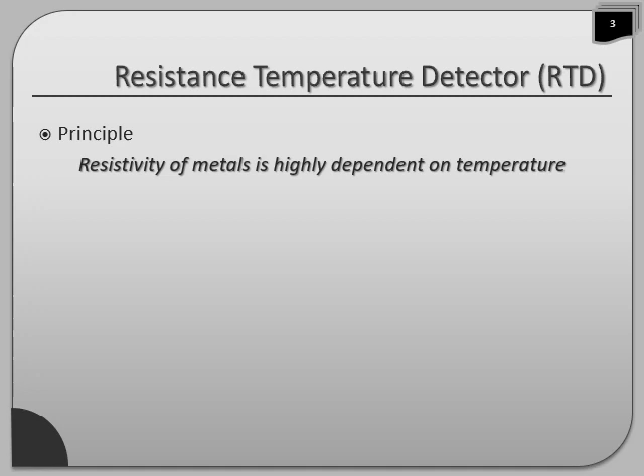RTD or resistance temperature detector works on the principle that resistivity of metals is highly dependent on temperature. In fact, if you increase the temperature, resistivity also increases. RTD is a temperature measuring device composed of resistance thermometer element, internal connecting wires and a protective shell.

Resistance thermometer with metallic conductor is known as RTD or resistance temperature detector, whereas the resistance thermometer that uses a semiconductor measuring element is known as thermistor.

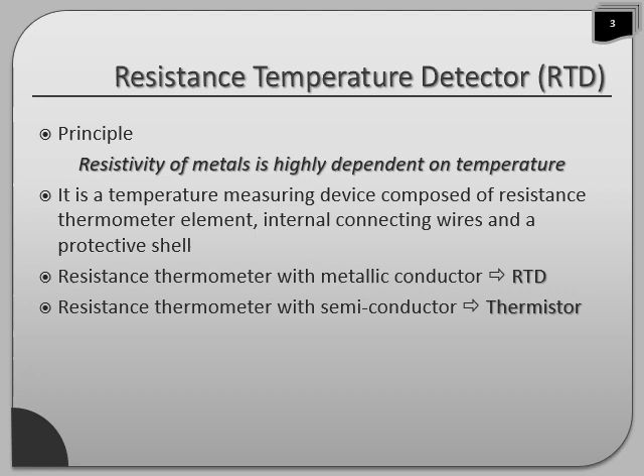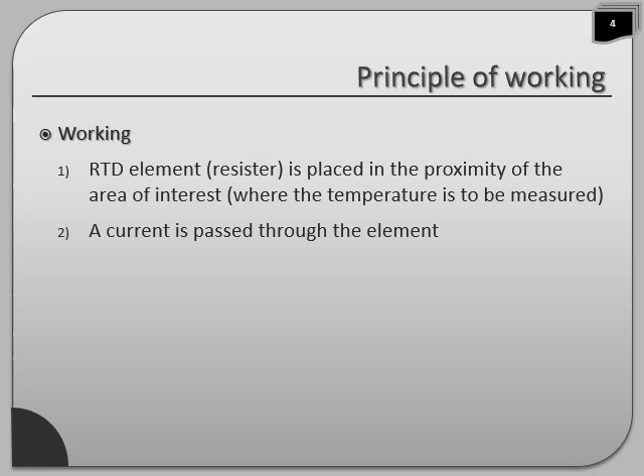The working of RTD is very simple. RTD element or the resistor is placed in the proximity of the area of interest where temperature is to be measured. A current is passed through the element. Value of the resistance of RTD element is measured. The resistance value is correlated to temperature using resistance temperature characteristics of the material of the element.

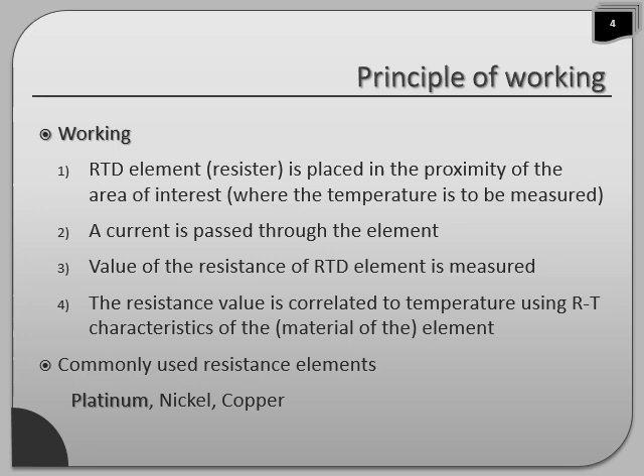Several metals are used as resistor elements. Examples include platinum, nickel and copper. Platinum is very popular among these metals. What are the desirable characteristics of RTD elements? RTD element metal should be sufficiently ductile. Wire forming should be possible. It should have linear temperature resistance relationship.

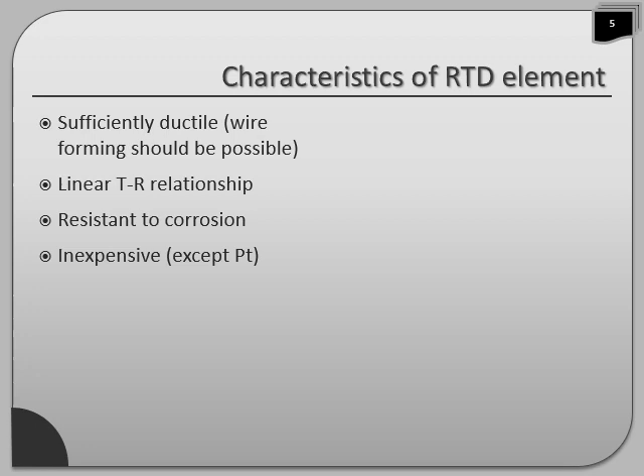It should be resistant to corrosion. It should not be affected by the environmental conditions. It should be inexpensive. This condition is difficult to meet in case of platinum since it is one of the costliest metals. It should be stable and sensitive as well. It should be able to measure small temperature variations as well. It should give reproducible results.

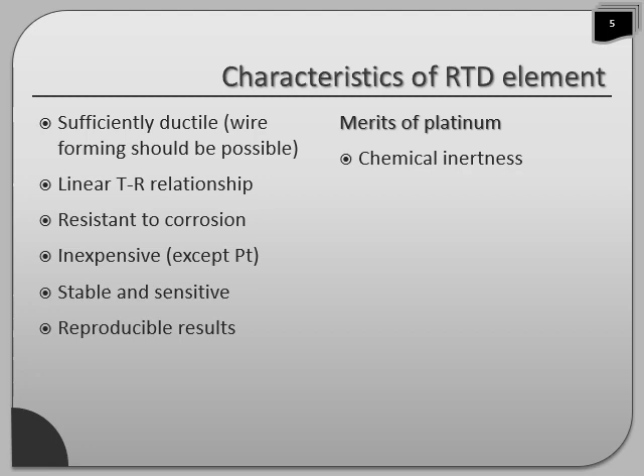Platinum is very popular as RTD resistor element. What are the advantages? It is chemically inert. Its chemical inertness is great. It has almost linear temperature resistance relationship. It also has large temperature coefficient of resistance which enables to measure small variations in temperature. It is stable over a long period of time.

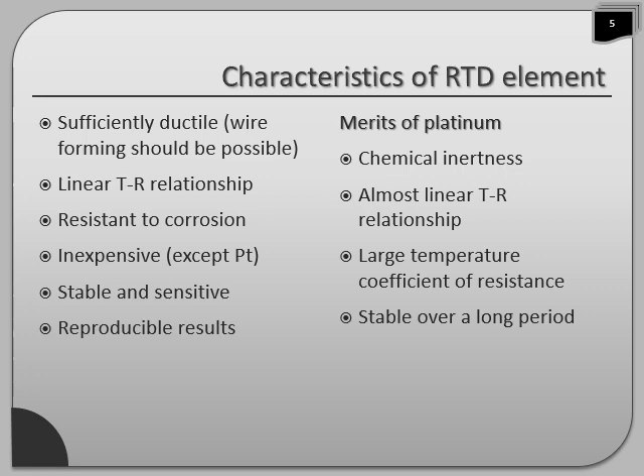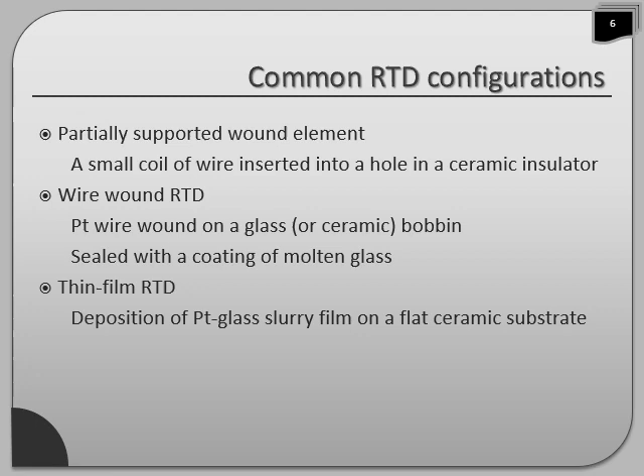There are three common configurations of RTD. First one is partially supported wound element in which a small coil of wire is inserted into a hole in a ceramic insulator. Second one is wire wound RTD in which a platinum wire or any other metallic wire is wound on a glass or ceramic bobbin. The setup is sealed with a coating of molten glass. Thin film RTD, the third type, where deposition of platinum glass slurry film is done on a flat ceramic substrate.

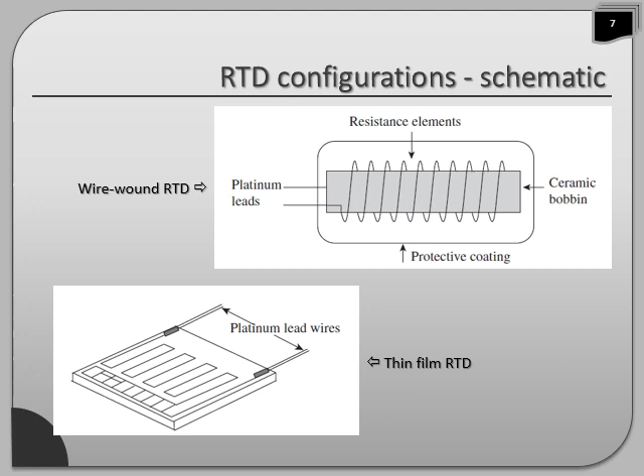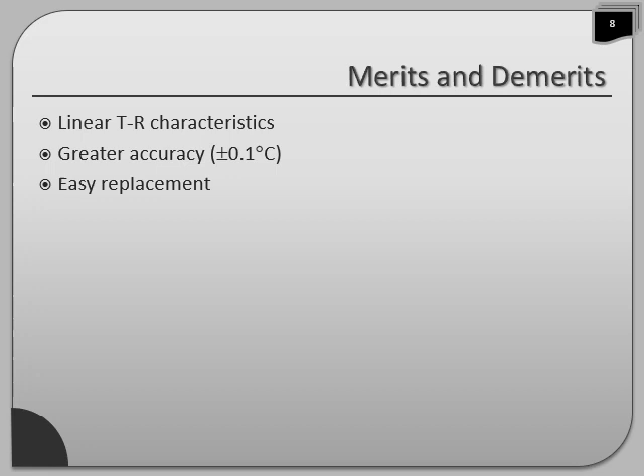What are the merits and demerits of RTDs? RTDs generally have almost linear temperature resistance characteristics. They have greater accuracy in the order of plus or minus 0.1 degree centigrade. It is easier to replace, so maintenance of RTD is easier. They have a wide working range without losing much accuracy. Further, they are stable over long durations. So over long exposures, they give stable readings. Multiple resistance elements also can be used in the RTD setups.

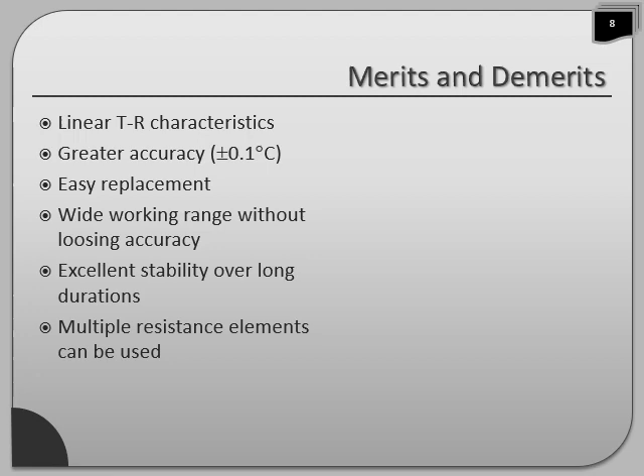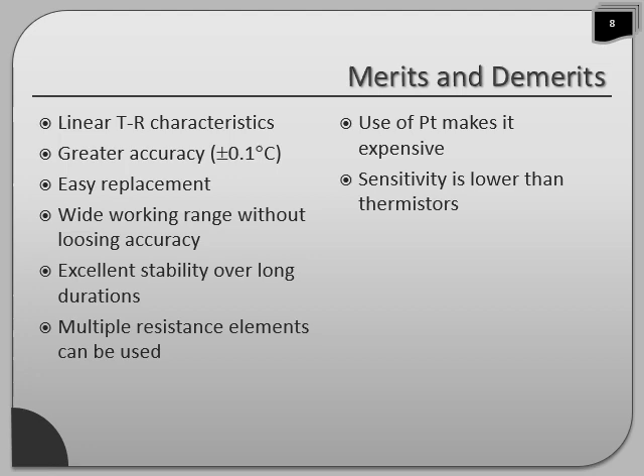There are several disadvantages. First one and the most important one is use of platinum makes the setup costly. Sensitivity is lower than thermistors, although it is better than thermocouples, but compared to thermistors, its sensitivity is lower.

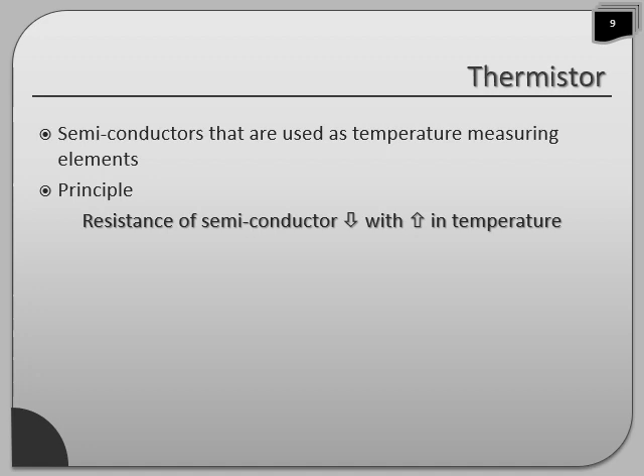Now we will see what the thermistor is. Thermistors are those resistance temperature measuring devices which use semiconductors. So semiconductors that are used as temperature measuring elements are known as thermistors. What is the principle? Resistance of a semiconductor decreases with the increase in temperature. You may notice the difference with the principle used in RTDs. Resistance of the metal increases with the increase in temperature, whereas resistance of a semiconductor decreases with the increase in temperature.

Commonly used thermistors: germanium with small quantities of arsenic, gallium, antimony. Then the other possibilities are metal oxides. Oxides of manganese, nickel, cobalt, iron, copper, zinc. Several possibilities are there. The temperature range of thermistors is from minus 250 degree centigrade to 650 degree centigrade.

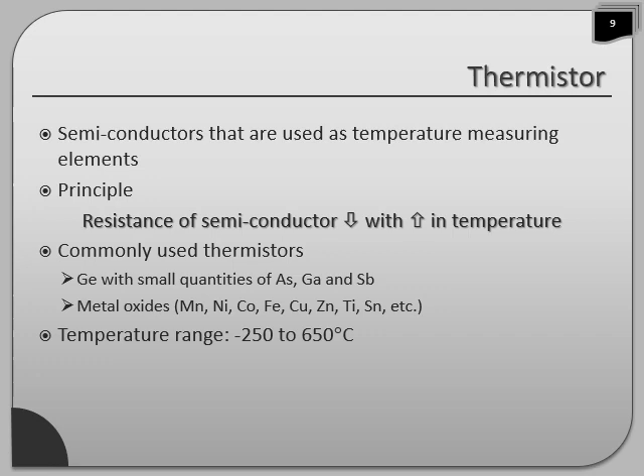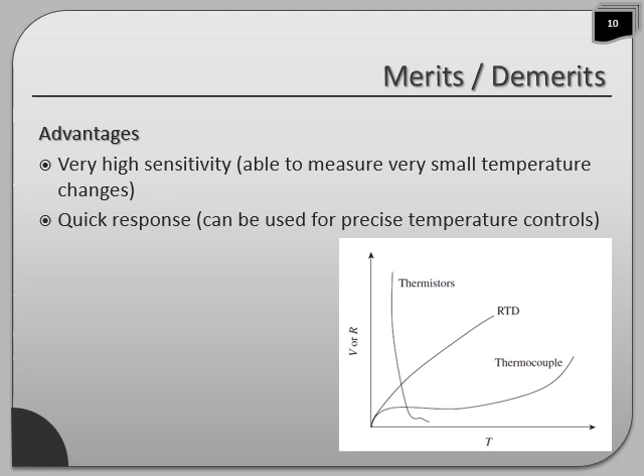So on the basis of sensitivity, thermistors are very highly sensitive. Next comes RTD, next comes thermocouple. The response time is short, quick response. They can be used for precise temperature controls since the response time is small. They are not very expensive. However, there are some disadvantages.

Compared to many others, specifically RTDs, their temperature resistance characteristics are non-linear. Therefore, careful calibration is required. Then temperature range is narrow compared to others. So here you can see temperature range is narrow.

They are not so stable with time. Unlike RTD or thermocouples, they are not very stable with respect to time. So if you expose it for a long period, it may give rise to errors. There are chances of self-heating errors as well. It is closely related with the earlier disadvantage.

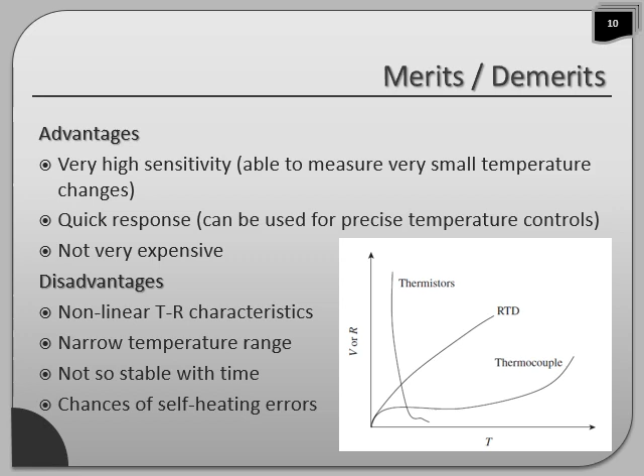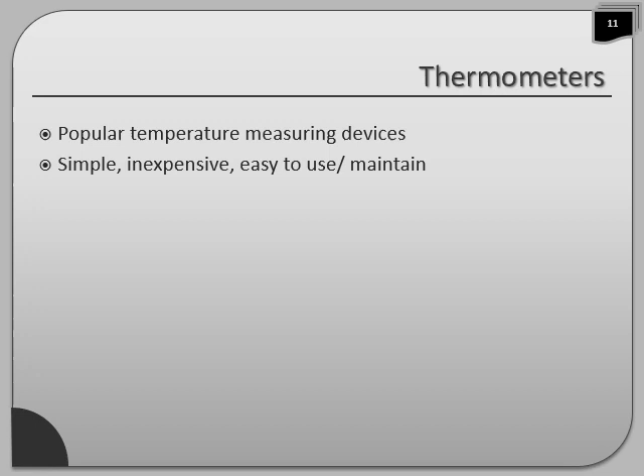Now we will move on to thermometers. They are the popular temperature measuring devices. They are simple, inexpensive, easy to use and maintain. Common types are liquid in glass thermometers, pressure thermometers, and bimetallic strip thermometers.

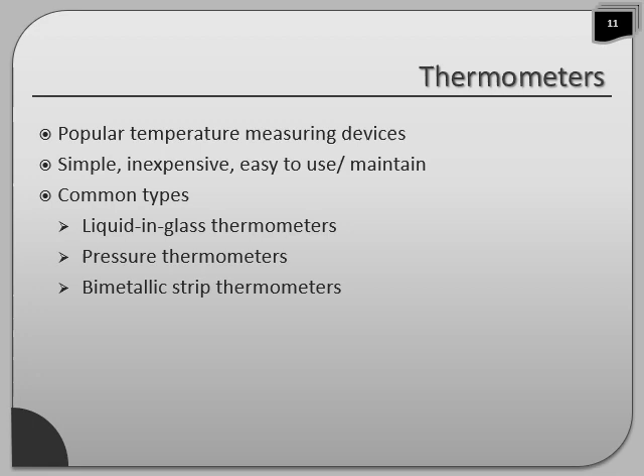So liquid in glass thermometers. The sketch shows the common thermometer which we use in our day-to-day life. They are the most popular and widely used temperature measuring instrument. There is a temperature sensing liquid used. Mostly it is mercury, but other choices are also there. Alcohol and pentane also can be used.

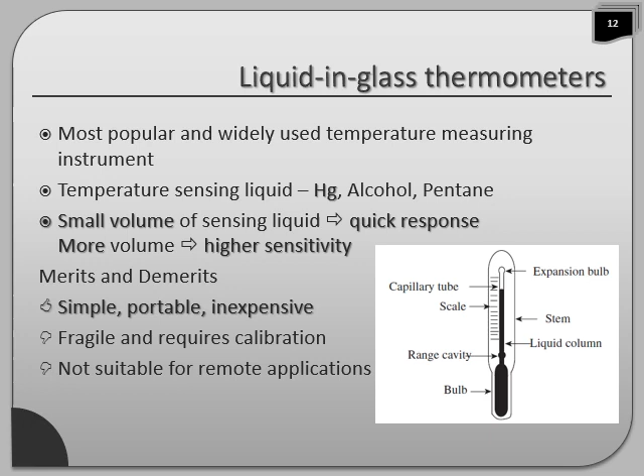If you use a small volume of sensing liquid, it gives quick response. However, sensitivity will be less. Whereas if you use large volume, sensitivity will be better, but response time is more. So liquid in glass thermometers are simple, portable, inexpensive. However, disadvantages: they are fragile, require calibration, and are not suitable for remote applications.

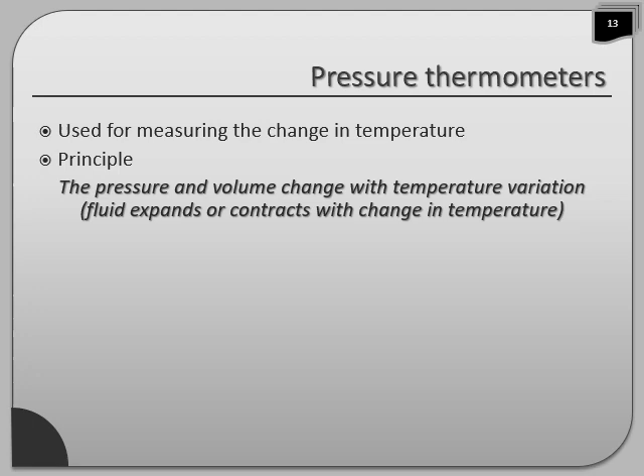Pressure thermometers are used for measuring the change in temperatures. The principle is the pressure and volume change with temperature variation. That means for any fluid, if you change the temperature, its pressure and volume change. In other words, fluid expands or contracts with change in temperature. This is used in pressure thermometers.

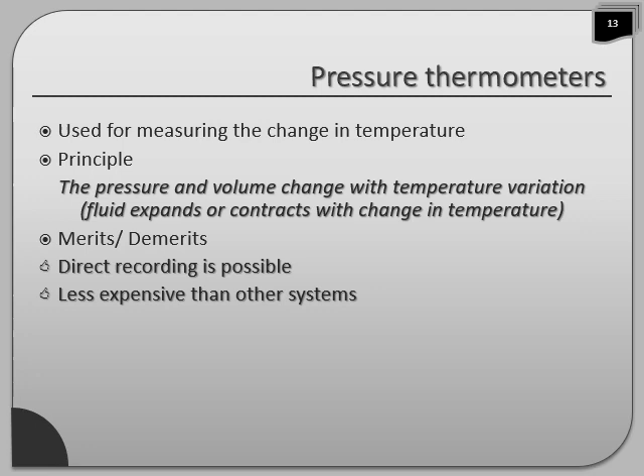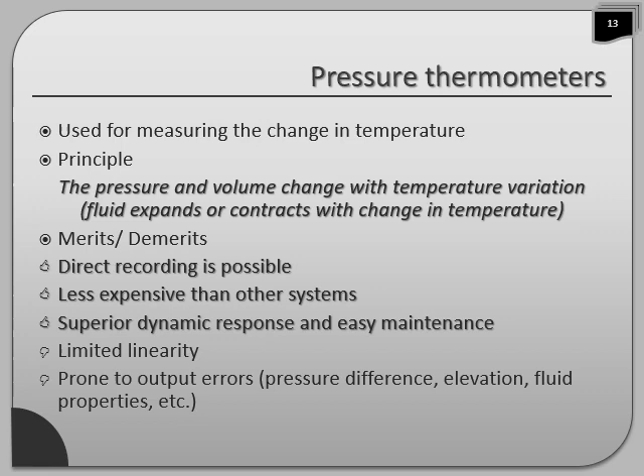Pressure thermometers also have several merits and demerits. Direct recording is possible. They are less expensive than other systems. Further, they provide superior dynamic response and maintenance is also easy. On the other hand, their linearity is limited. They are prone to output errors. Pressure differences, elevation differences, and fluid properties affect the output.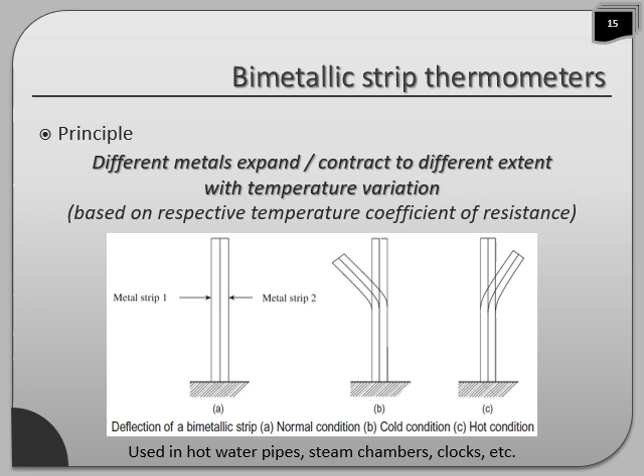So if in the cold condition they bend to the left, then when heated they will bend to the right. This is due to the differential expansion of the constituent strips. Two different metal strips are used, both expand or contract to a different extent. This is the principle of bimetallic strip thermometers. They are used in hot water pipes, steam chambers and clocks.

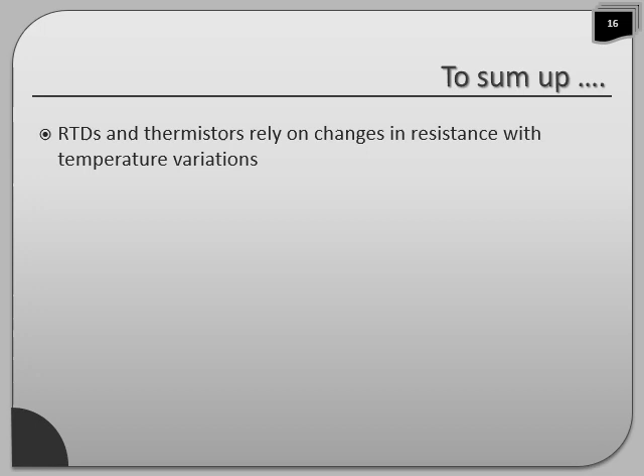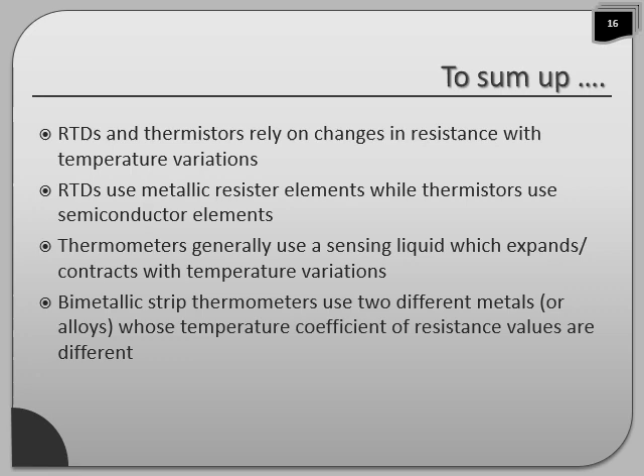To summarize, we have seen that RTDs and thermistors rely on changes in resistance with temperature variations. RTDs use metallic resistor elements while thermistors use semiconductor elements. Thermometers generally use a sensing liquid which expands or contracts with temperature variations. Bimetallic strip thermometers use two different metals or alloys whose temperature coefficient values are